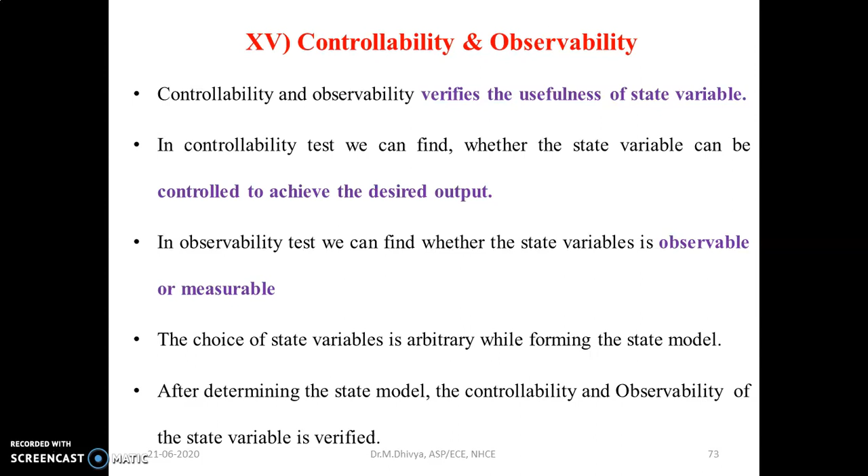Thus, we can infer that the existence of a complete solution to the control system design depends upon the controllability and observability concepts. If the state variable is not controllable, then we have to go for another choice of state variables, as I told previously. And if it is not measurable or observable, then we have to go in for the other state variables in order to construct the control signals.

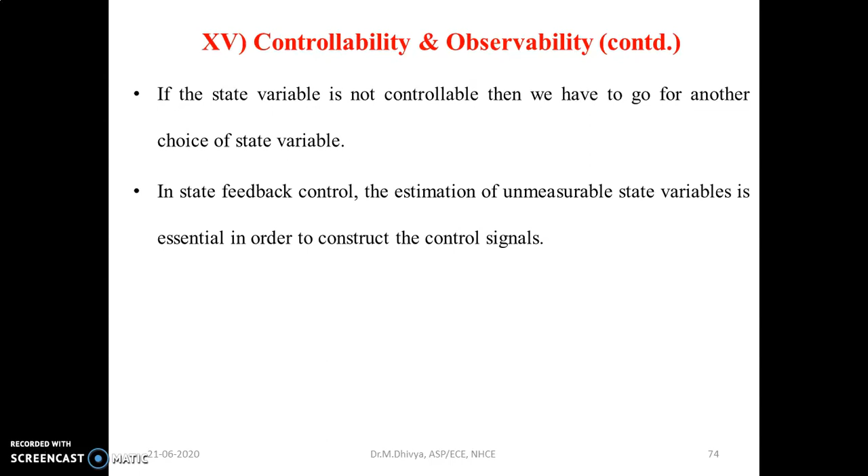The definition for controllability and observability. In simple terms, the definition of controllability is: a system is said to be completely state controllable if it is possible to transfer the system state from initial state to any other desired state in a specific time by a control vector. Here the control vector refers to the input vector. It means that the input has to drive the initial state to the desired state. Hence, it incorporates the solution of the non-homogeneous equation indirectly.

It means that a system is completely state controllable if it is possible to transfer the system state from initial state to any other desired state in specific finite time by the control vector. Definition of observability: a system is said to be completely observable if every state x(t) can be completely identified by the measurements of the output over a finite interval of time. Each and every state has to be identified by the measurements of output over a finite interval or finite duration of time.

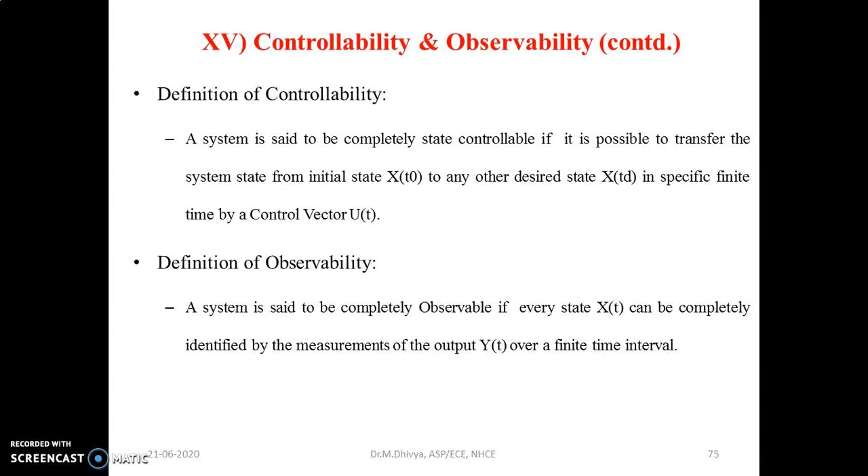There are two methods for determining controllability and observability. One is Gilbert's method and another one is Kalman's method. In Gilbert's method, both controllability and observability can be tested. Gilbert's method is tedious compared to Kalman's method, but it is more accurate. In Gilbert's method, we will be finding out the system matrix, the eigenvalues, and we will be employing the canonical transformation, the Jordan canonical transformation.

And we will infer that if the last row of each Jordan block is not all zero, then the system is completely controllable. Similarly, for observability, none of the columns of matrix C should be zero. In that case, the system is completely observable.

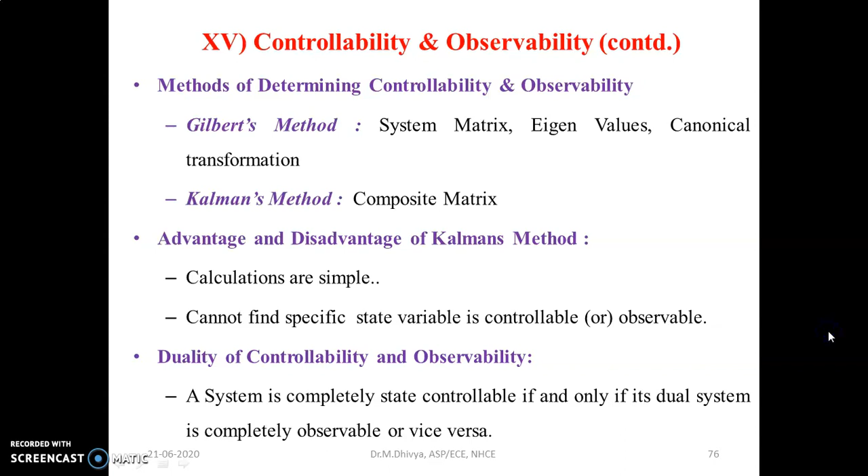Now let us get into one problem based upon controllability and observability using the Kalman's method. The state model in matrix form is given below. Find whether the system is completely observable or controllable with Kalman's method. This is the state model, and we are asked to find out the test for controllability and observability.

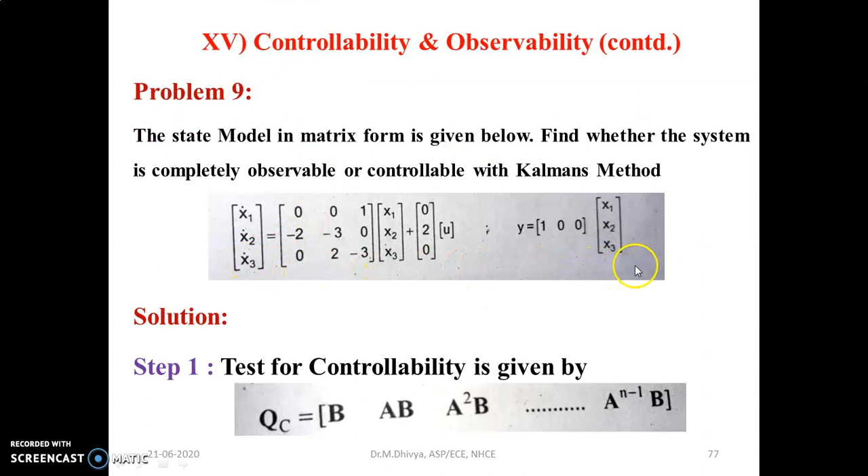The test for controllability is given by QC is equal to B, AB, A squared B, till A power n minus 1 into B. The system is completely controllable if the rank of the composite matrix QC is n. In the given problem, the rank of the matrix is 3; the system matrix is 3. The determinant of QC should not be equal to 0. Then the system will be completely controllable.

Determine A squared, A dot B, A squared B. So the composite matrix for controllability for rank 3 is given by B, AB and A squared B. A squared is given by A into A. So multiplying the two matrices, we will get the resultant matrix A squared. Now multiply A dot B. The resultant matrix will be a single column matrix. Now multiply A squared into B. We have obtained A squared and we know the value of B, so if we multiply, we will get again a single column vector.

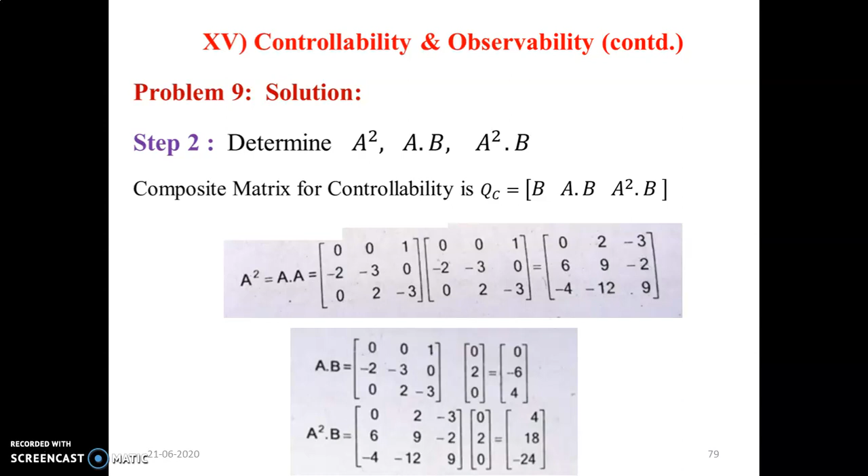Now, after computing this, we can insert it into the composite matrix: B as 0, 2, 0, A dot B single column matrix as 0, minus 6, 4, and A squared B as 4, 18 and minus 24. Now calculate the determinant of QC. The value of QC is 32. It is not equal to 0 and the rank of the matrix is 3. Hence, the system is completely state controllable.

As per Kalman's test, the system is completely controllable if the determinant of the composite matrix QC is non-zero. The rank of QC is equal to 3 and the system is state controllable. We can infer the advantage in Kalman's test is that calculations are simple. But the disadvantage in Kalman's test is that we can't find the state variable which is uncontrollable.

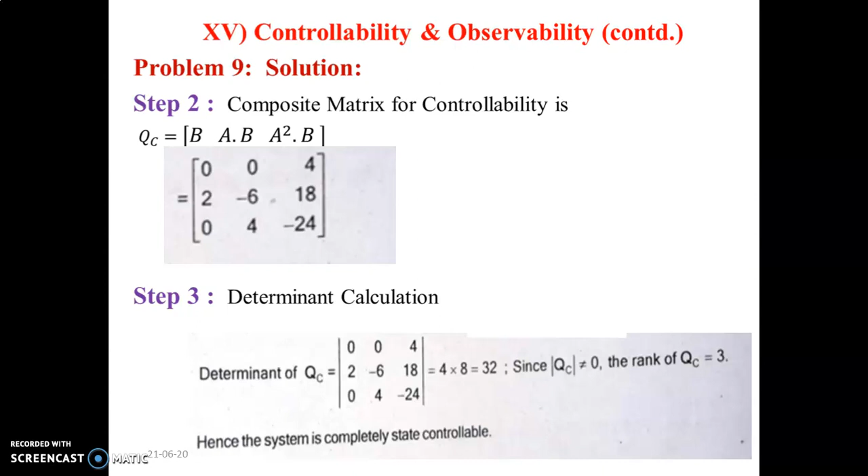Now let us proceed with the Kalman's test for observability. Kalman's test for observability is given by Q0 is equal to C transpose, A transpose C transpose, A transpose the whole square into C transpose, A transpose the whole cube into C transpose, and it extends till A transpose to the whole power of n minus 1 into C transpose. The system is completely observable if the rank of the composite matrix Q0 is n. Here, the rank of the composite matrix is 3. And the determinant of Q0 should not be equal to 0.

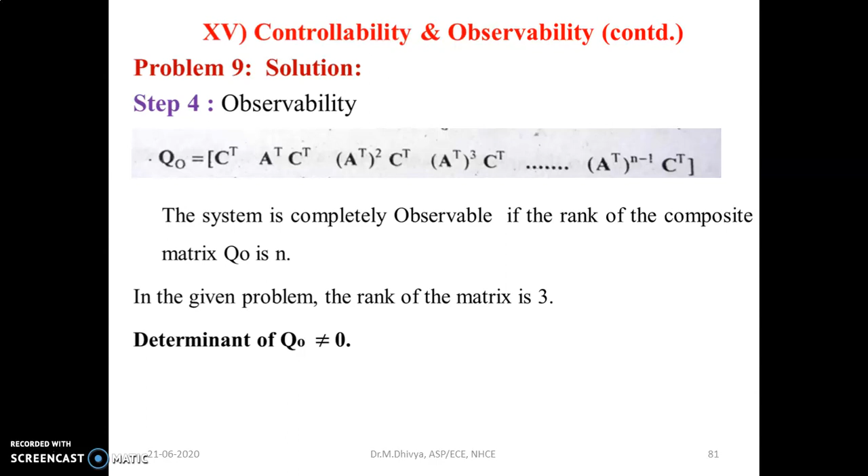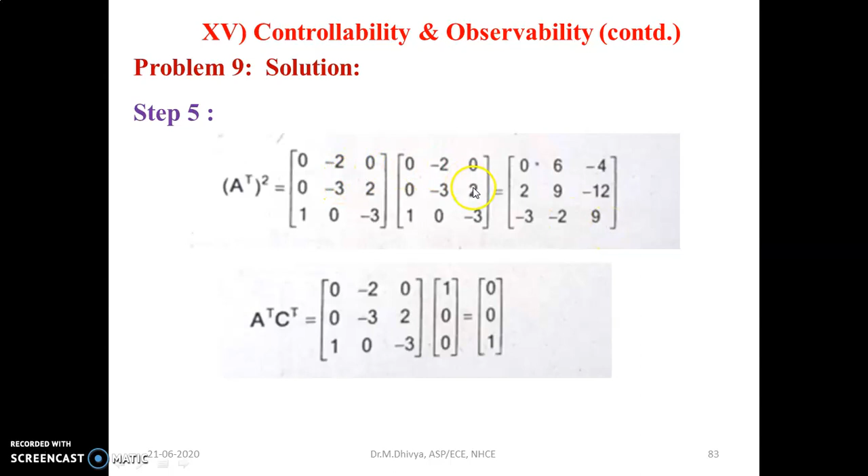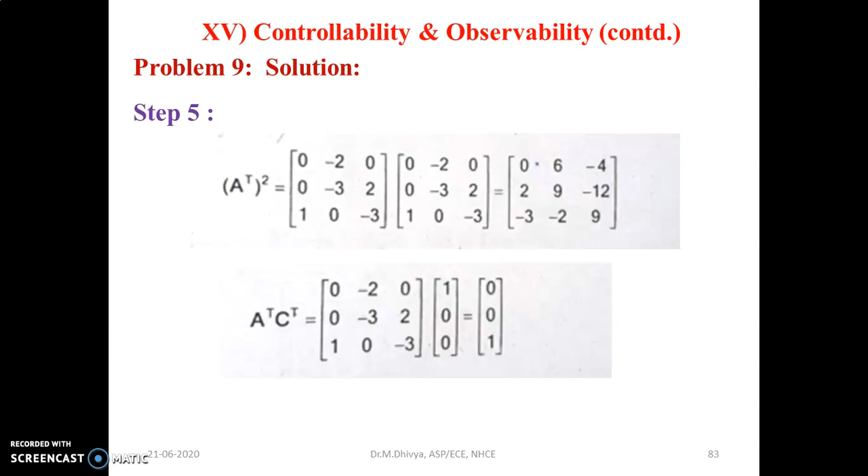First, let us find out A transpose and then C transpose. Now, A transpose the whole square is obtained by multiplying A transpose into A transpose. And then A transpose into C transpose, we will get a single column vector, similar to the composite matrix in controllability, and then find out the value of A transpose the whole square into C transpose. Now substitute the 3 single column vectors in the composite matrix for observability.

Determinant Qo is minus 2. Qo is not equal to 0. The rank of the matrix is also 3. Hence, the system is completely observable, or all the state variables of the system are observable. As per the condition of Kalman's test, the rank of the matrix is n if the determinant of the n cross n composite matrix Qo is non-zero. In this case, the system is completely observable if the rank of Qo is n and the determinant is not equal to 0.